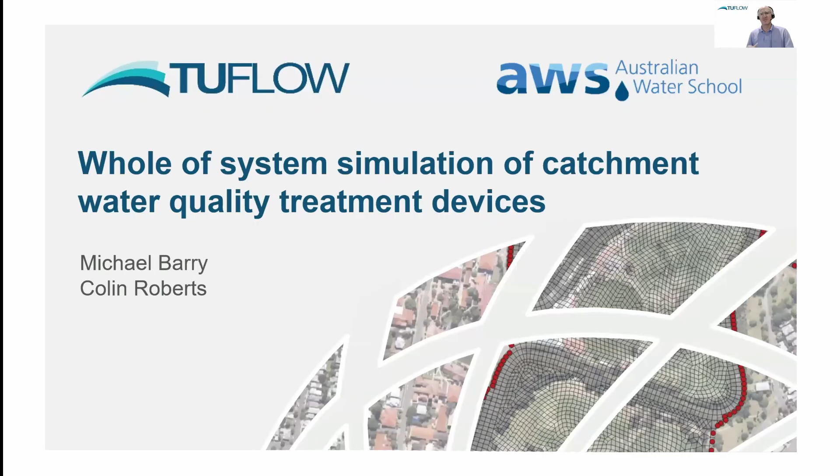So ultimately, we're doing modelling to improve our environment, and one of those improvements is treatment devices. So we're talking a bit about how we might do that these days with some modern tools and some outcomes, and we'll talk about a few different case studies around that.

So what we'll run through today is we'll talk a bit about the context, why we're here talking about this, what is whole of catchment water quality simulation, and what is simulation of pollutant treatment, or interventions as sometimes called. And that'll lead us naturally to a point of where we've come from as an industry in this space, and one or two current challenges that present themselves to our industry on an ongoing basis.

And so once we've come to those challenges and realize what they are, then we'll explore those a little bit with some case study using modern approaches to simulating catchment water quality processes, but more importantly, treatment devices or intervention devices. And we'll talk through a case study of how we've done that and look at some outcomes and some fancy animations. And then we'll wrap up.

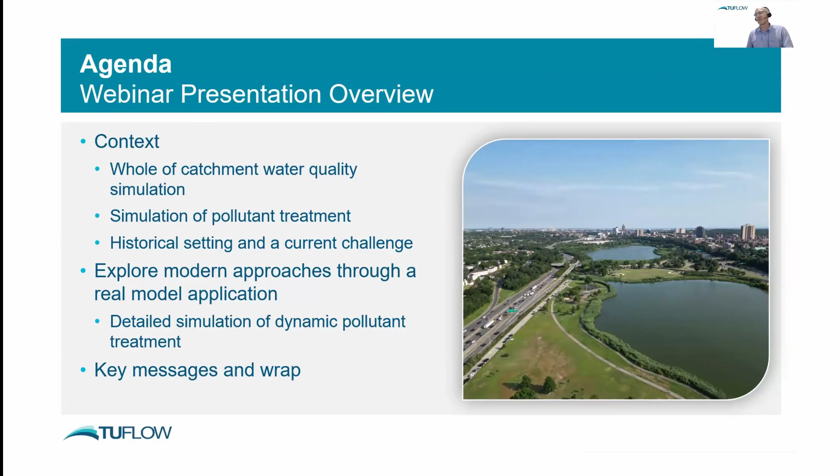So whole of catchment water quality simulation. What is it? Well, what it really is, we are trying to use numerical models or numerical platforms to simulate the passage of both water and the pollutants within that water as they travel through a catchment from source to receiving waterway. So from top of catchment to bottom of catchment, we are trying to dynamically simulate surface water, subsurface water, and the pollutants and constituents that go with those water flows. That's what we're trying to do.

Why? Well, in order to better manage our environment and environmental systems, we really need to understand the volume and mass fluxes, so the volume of water fluxes and the mass of pollutant fluxes. We need to understand what they are in our catchments to better manage our catchments. It seems pretty obvious, but that's what we need to do. And one of the reasons that we would need to understand those fluxes is so that we can intervene and control those fluxes or change those fluxes so that we can mitigate negative impacts of catchment change.

I'm sure we're all aware of catchment change around the world through urbanisation or deforestation or other related processes. Understanding volume flows and mass fluxes of pollutants as a result of those changes is really important, so that our end goal, not always, but mostly our end goal, is the protection of downstream receiving waterways and the ecology that goes with those waterways. So we really do need numerical tools that can help us robustly simulate whole of catchment water flow and pollutant flow and transport processes, so that we can start addressing these questions around how do we better manage these catchments and mitigate the impacts of largely human-derived interventions.

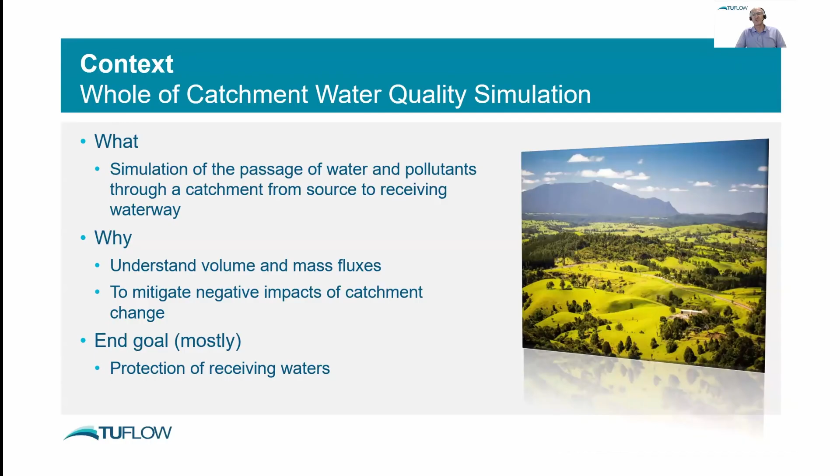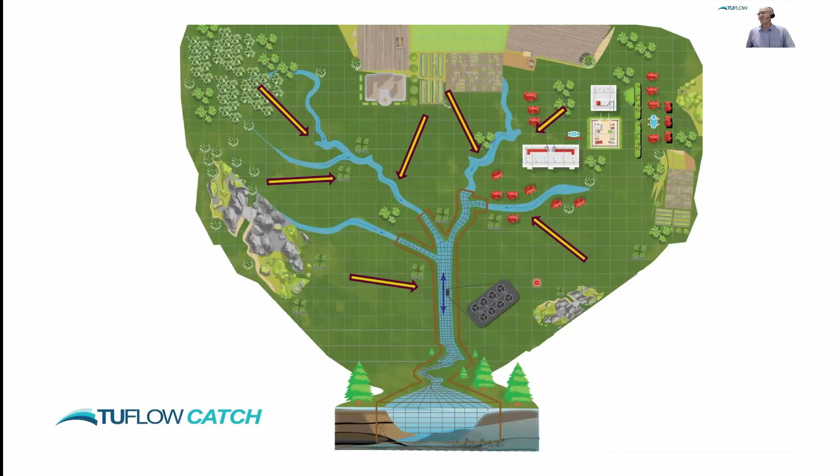But once we've done that, what we need to do is say, well, we understand those fluxes. What are we going to do about it? What can we do to mitigate or manage or reduce those fluxes so that environmental impacts are less from behavioural changes or land use changes that might have been occurring in the catchment? So what we'll try and do typically is then say, well, let's try and put some interventions or treatment measures in the catchment to reduce pollutant loads that are being delivered to our downstream waterways.

And those sorts of devices that we talk about can be wetlands, constructed wetlands, or swales, or filter strips, or bioretention systems. There's lots of different systems that can be put in place. And the idea of these systems is that they receive water from upstream and receive pollutants from upstream, and they remove some of those pollutants through a different range of processes, biological or otherwise. They'll mainly transmit most of the water that they receive, but they will remove pollutants.

So our job, if we're trying to minimize the impact of pollutant generation and transport, is to optimize on a catchment-wide basis where these devices are and how they treat pollutants, how they best remove pollutants from our waterways and therefore our downstream receiving water bodies. And so the end goal, not always, but mostly the end goal, in my experience, is that in understanding these fluxes and in designing and implementing some interventions or treatment measures, we can most effectively and efficiently protect and rehabilitate our receiving waters.

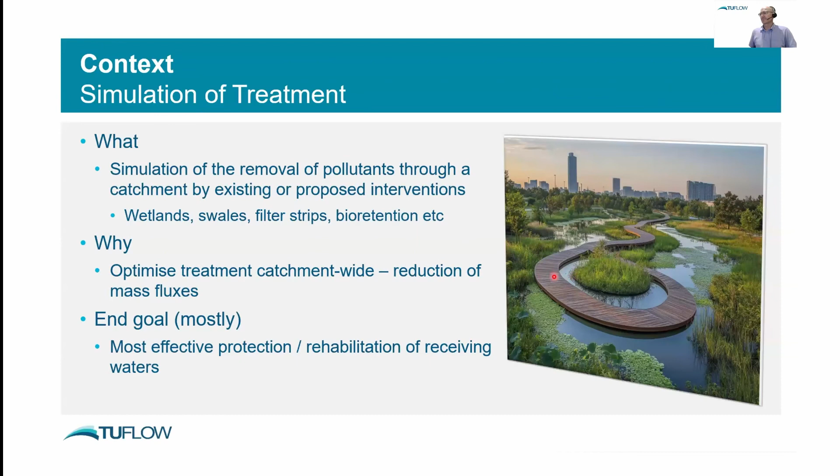Just going back to our previous figure where we had our catchment and our mass fluxes of both pollutants and water flowing off the land uses into the receiving waterway, our job with treatment devices is to say, well, let's try and put some treatment devices in this catchment in some locations and see what they do in terms of improvement of water quality. So just in this conceptual example, we'll say, let's put in some treatment devices where these green lines are that might intercept and reduce fluxes of pollutants or mass so that downstream of those devices, we go from yellow to green.

We've gone from higher fluxes of mass to lower fluxes of mass. We've removed some of those pollutants. They stay in those treatment devices and are removed, biological or otherwise. So that by the time we get to the bottom of our catchment or receiving waterway, we go from a red summation of pollutant fluxes to yellow, something a bit less.

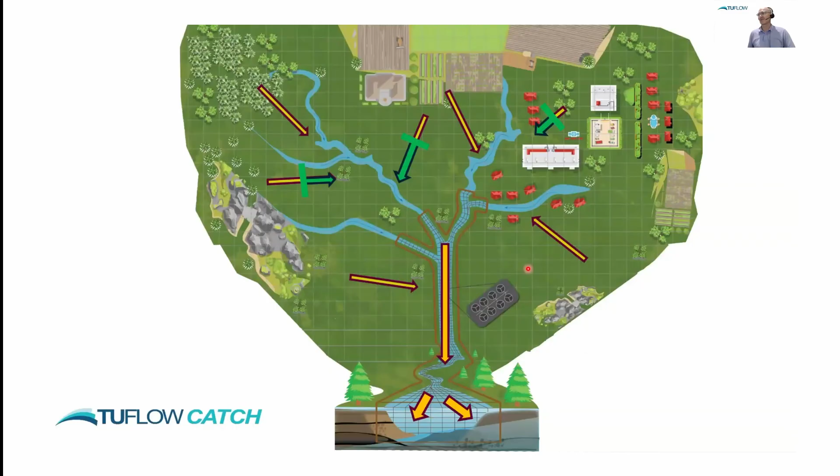So our job, I think, as professionals or practitioners in this industry is to work out where we put these treatment devices, how we configure them, how we maintain them so that we can get the best return on our investment to reduce these pollutant fluxes through our catchment to protect our downstream waterways. And that's what we're talking about today. So that's the basic process of volume fluxes and mass fluxes through our catchments and how we would like to go about understanding the treatment of those for environmental reasons.

How have we done that in the past? We have obviously used numerical tools in the past, generally speaking. And the primary approach for doing so, and it's not the sole approach, and I'm not meaning to say that's the only approach that's ever been used, but in my experience, since the mid-90s, the most common approach has been the use of lumped hydrology models to simulate water flow.

And when we say lumped, we're sort of talking about bucket models where we have conceptual buckets of rainfall falling on soils, and when the soil's wet, they discharge to the surface and water runs downstream, and one bucket's outflow becomes the next bucket's inflow, et cetera, down the catchment. And so we can end up with a bottom of catchment prediction for water flows using this sort of lumped or bucket approach.

And what we end up doing is we end up saying in our catchment, we might have 10 subcatchments, and each of those subcatchments will be a conceptual bucket, and everything within that subcatchment is averaged. We don't have any spatial resolution within those subcatchments. They are all one bucket. And they might be of the order of tens of square kilometres or hundreds of square kilometres in some cases. Inside those subcatchments, we can't resolve any processes other than what's happening with the buckets, where they're overflowing and filling up.

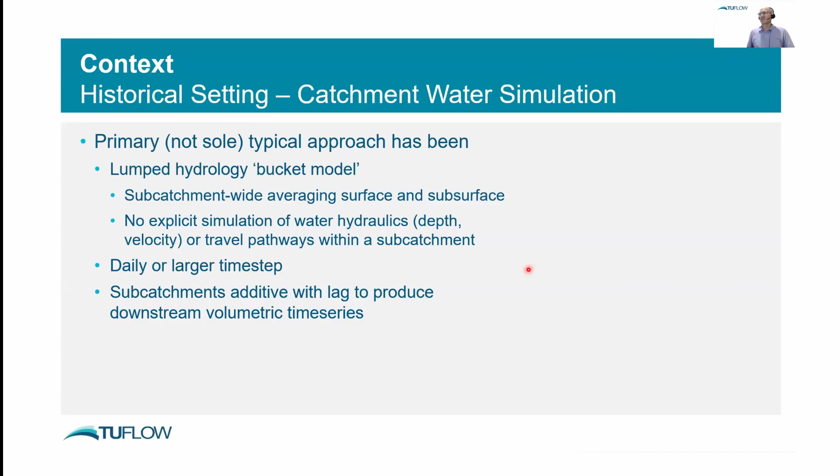And we can't simulate processes at a finer time step than our model operates on. And typically they are daily. And so when we do our hydrology, we do a subcatchment by subcatchment bucket analysis. We add up those volumes at the end and we say that's the flow coming out of our catchment. That's been the predominant approach from my point of view.

Something similar applies to pollutant export predictions in these sorts of models. And again, we use the lumped subcatchment or average subcatchment approach. And what we say is, well, given the land use mix in these subcatchments, we use some weighting algorithms to come up with an end of pipe event mean concentration and dry weather concentration for each pollutant we're interested in.

Once we have those concentrations, we multiply those concentrations by the lumped hydrology flow that we just got from the previous slide. And we say, well, this is the mass of pollutant coming off the subcatchment on a daily time step by getting a lumped flow multiplied by an event mean concentration. There's the mass. Again, on a daily or larger time step.

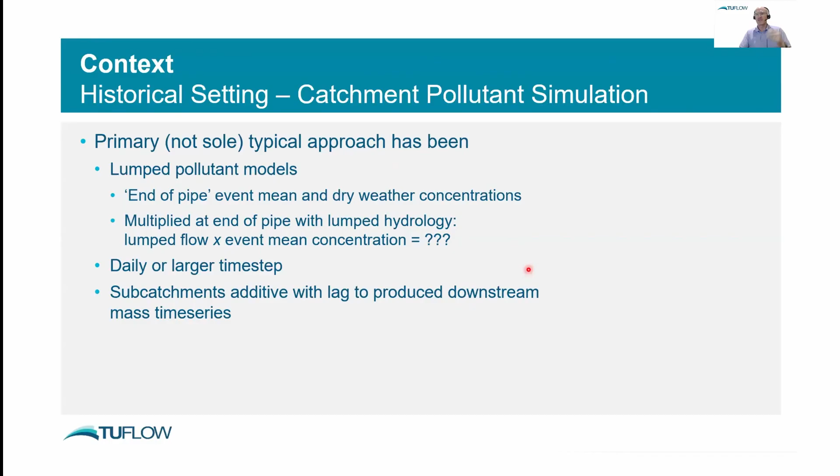And again, these are added up down the catchment. So at the bottom of the catchment, overall, we have the addition of 10 or 20 or 50 or 100 subcatchments worth of these pollutant predictions. Again, not the only approach, but certainly one that I've seen commonly used.

Again, the downsides of this we've talked a little bit about, but there are some upsides, of course, in this typical approach, and that is that it's fast. We can definitely simulate tens, hundreds of years worth of hydrology and pollutant export using these sorts of approaches because they're fast. And they're pretty good at looking at those multi-decadal timescales.

They're pretty good at looking at the relative impacts of hydrologic changes and pollutant export changes as a result of broad-scale gross land use changes, for example. So over 100 years, we're going to lose this much forest, we're going to build this many houses. What broadly happens to hydrology? What broadly happens to pollutant export? And let's do it quickly. These models are pretty good for that and have been used widely and successfully.

One of the downsides, and this is what we're talking about today, is that when we go for this lumped approach in our subcatchments, we lose on-ground connectivity between the detail of hydraulics, i.e. water flow pathways, and treatment interventions. So in a lumped subcatchment, we can't say this water flows through this device. All we can say is, look, we've got these devices in the subcatchment. We think they're going to remove this amount of pollutant, but we can't resolve it because we've lumped our subcatchments. So we miss that connectivity between what water flows where and into which devices.

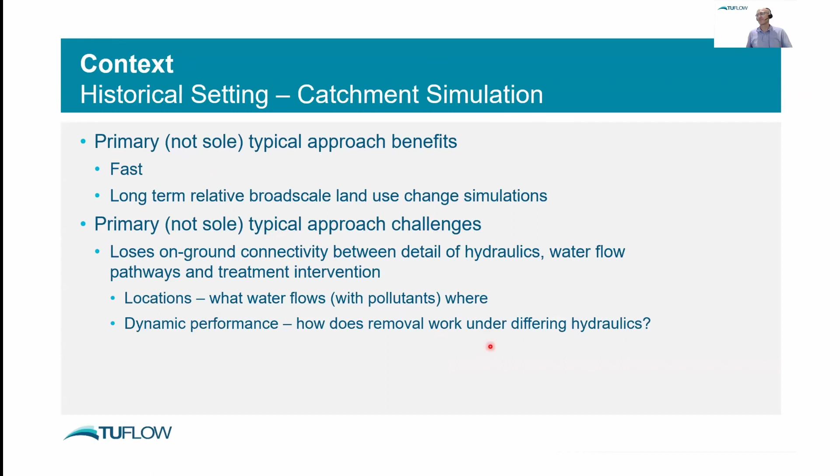So we need to attend to the spatial and temporal detail of hydraulics and treatment. That's what I think we do if we're looking at this key issue of connecting pollutant generation to pollutant treatment. And we're trying to really make sure that we're optimizing where we put our devices and how we configure our devices, simulating the detail of water hydraulics and pollutant generation hydraulics. How do we do that with modern tools that don't need those lumping or averaging assumptions? That's what we're looking at today.

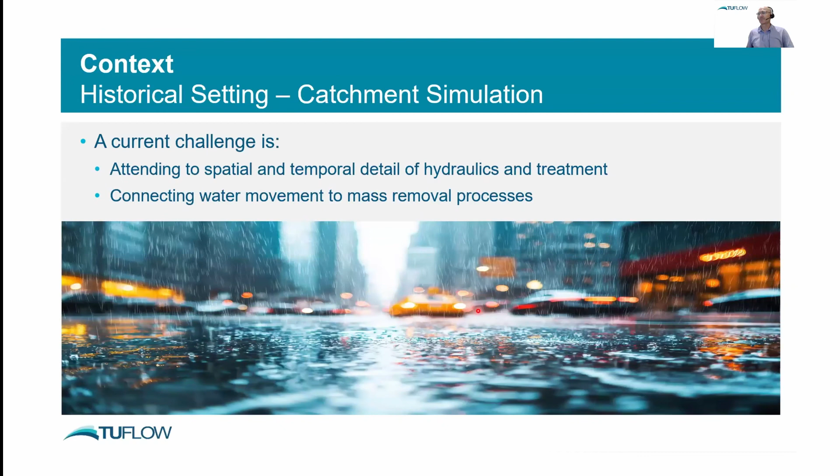How are we going to do that? We're going to look at a real model that's been set up to look at this specific issue, and it is of a catchment in Australia, in Brisbane, which is where I live. In fact, I live in the catchment that we're going to be looking at today, and it's known as Norman Creek Catchment. It drains directly to the Brisbane River, which is the main river in Brisbane, where Chris and I are based, at least.

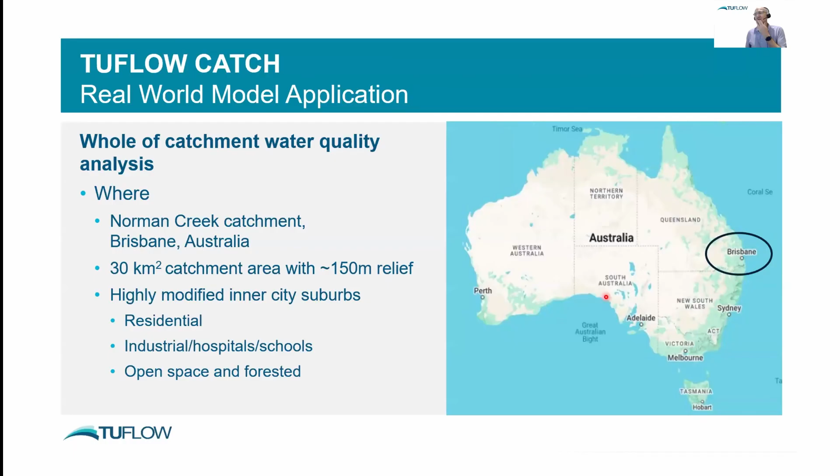The black ring here is where we are in general terms. It's roughly a 30 square kilometre catchment, so it's not huge, and relief top to bottom is about 150 metres. But it is highly modified in terms of its land uses because it's an inner city suburb. You can't really see from here in terms of land use, but you can see there's lots and lots of roads. So there's houses and there's industry and hospitals and schools. Although there is a little bit of open space and forested, but not too much.

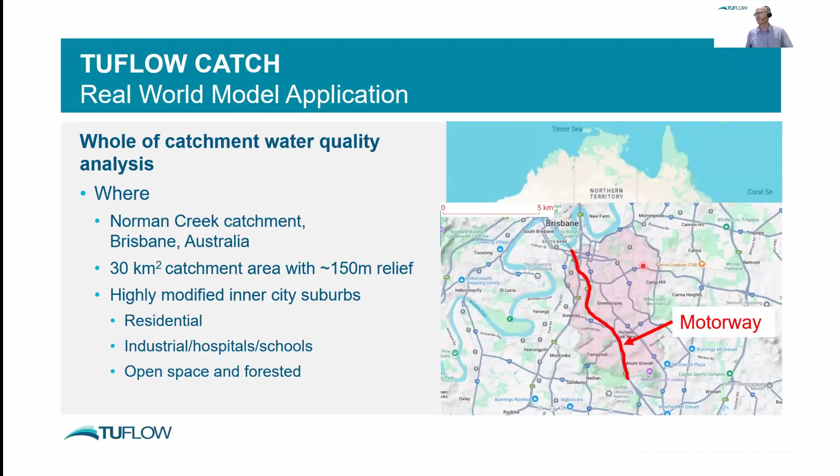What could we look at in a whole of catchment water quality analysis? Well, anything really. There's so much to look at, but we have to narrow it down, obviously, for a finite time of presentation. So we're going to look at sediment loads generated from roads in this Norman Creek catchment. And we're going to look at sediment loads generated from the motorway, which I just showed you, versus sediment loads generated from all other roads, everything but the motorway.

That includes the urban roads we might live on with our houses, and then arterial roads, and then things like highways, but not the motorway. That's motorway and everything else. We're looking at sediment generation from those separately so we can compare and contrast those. More importantly, we're going to look at how those predictions of pollutant generation can be treated through our devices and where we should put our devices and how they perform under different hydraulic conditions, etc.

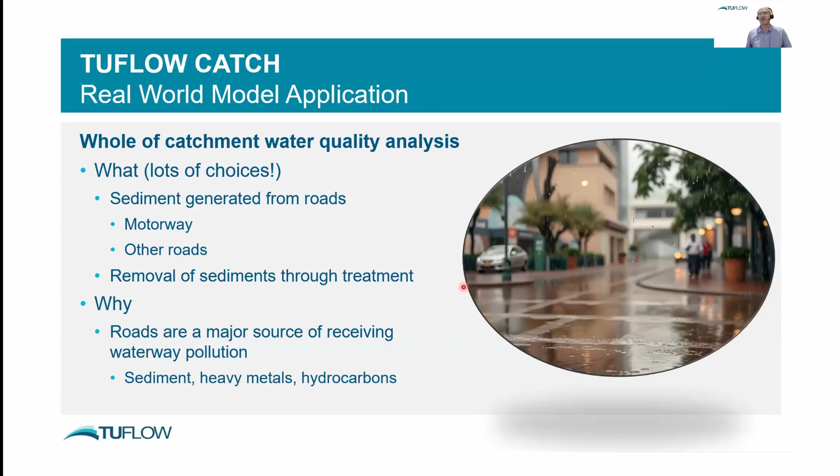Why are we bothering with roads? Well, roads really are a major source of receiving waterway pollution, not just sediments that we'll be looking at, but also a source of heavy metals that come from tire wear, brake pad wear, general engine wear, hydrocarbons, obviously dripping oil, petrol leaks, those sorts of things. So they really do contribute a lot of pollution to the environment. That's why we're looking at them today. But we will focus on sediments from the motorway, sediments from other roads, and see how they compare.

How are we going to do it? We're going to use a new product, TUFLOW CATCH, and TUFLOW CATCH is an integrated catchment and receiving model. It simulates explicitly the 2D hydraulics and pollutant export and transport throughout catchments from top of catchment to bottom of catchment with no lumping assumptions. It simulates surface hydraulics and subsurface hydraulics, as well as receiving hydrodynamics in 2D or 3D, as well as pollutant generation, transport and treatment, and it's all linked.

So we're not artificially linking one model with another. We can go from top of catchment right to the bottom in our tidal environment or our lake or whatever it is, all in one place without lumping or averaging assumptions. So this is getting to the whole issue we talked about before about linking water pathways with treatment devices. So we're actually simulating water pathways here on a highly resolved spatial and temporal basis.

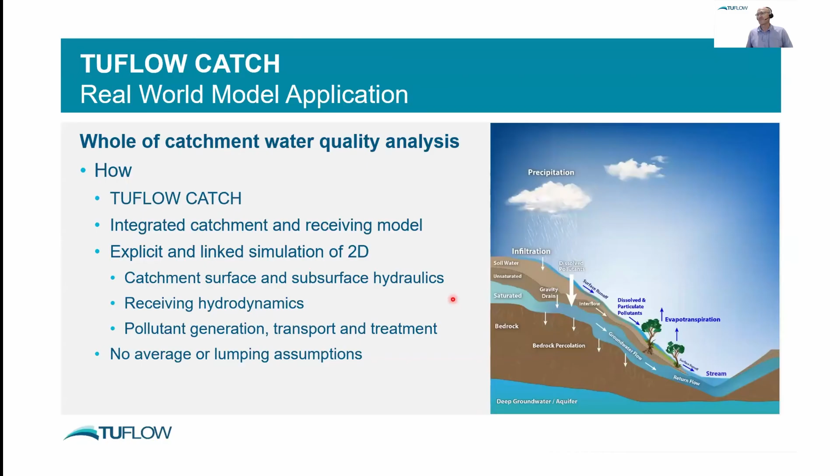Sometimes people think, oh, it's really complicated to set these models up. I need lots of data that I can't get hold of, and it's all very difficult. It's actually not. In this particular catchment, this is an inner city catchment, so it has lots of good data available to it.

So our model is a 5 meter grid size, and we have 2 soil layers, but the data we needed to build this model was all free, downloadable from the internet. I did it in not very long at all. I got the digital elevation model straight away. I got gridded rainfall that we can interpolate in TUFLOW and evapotranspiration.

All the land use and cadastre and imperviousness data was available from the local council, as was key pipe networks, some of which are in the model. It was all there. I was actually really impressed with how much data was available and everything I needed to build this model. I didn't have to pay for any of it or go on detailed data hunts. It was just there on the internet and away I went. So it was really easy to set up.

So we need to move away from thinking it's complicated to get all these data sets. It really isn't anymore. Depending on where you are, of course, in the world, understood. But in this situation, it was actually really easy. So please keep that in mind going forward.

That was in terms of hydrology, in terms of water movement, the TUFLOW model there. In terms of pollutant transport, we're focusing on sediment, and we're focusing on sediment from the motorway versus other roads. So what we used to force TUFLOW CATCH was measured sediment liberation rates. And these came from experiments that we conducted at BMT in 2003, 22 years ago.

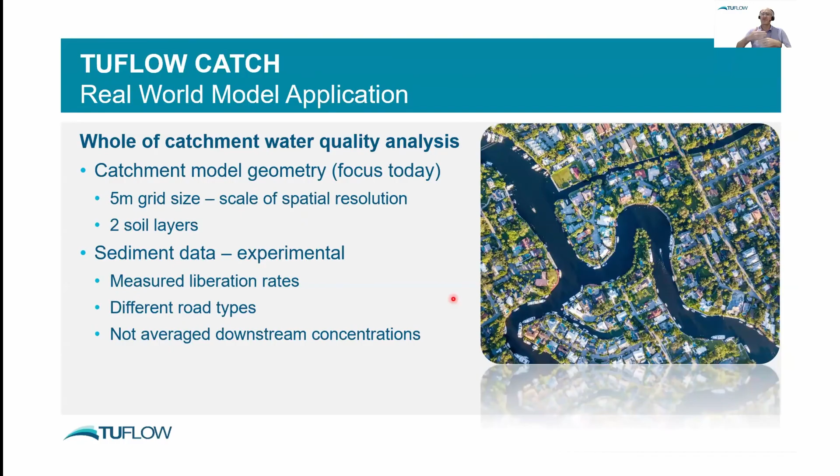So we have used those liberation rates to force and set up TUFLOW CATCH to say, if it rains with this intensity, what sediment is liberated from every 5 meter by 5 meter grid cell in my model, and then where does that go? We haven't said, oh, this is a forested land use, what's the event mean concentration downstream? We haven't done that. We've simulated from source using experimental data.

So we've been playing in this road runoff space for a while, and I'm going to show you one experiment that we conducted in 2003, actually right outside a house I used to live in. I don't live there now, but I used to live there in southern Brisbane. And this is a rainfall simulation that we did in 2003.

And from this experiment, we collected a whole lot of data that I've then used to populate this TUFLOW CATCH model, that data being generation or liberation rates of sediment from roads. So again, not the event mean concentration downstream, but the liberation of sediment from these roads. So let's have a look at the animation or the video here.

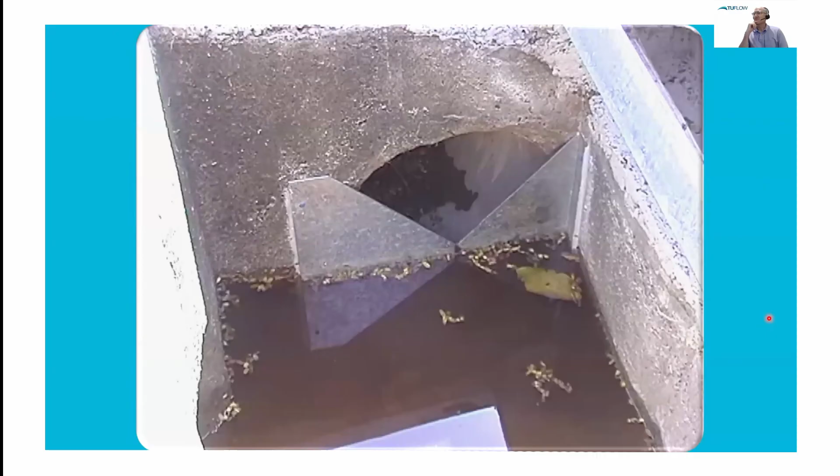Okay. There's no sound. This is Wemburn Street. This is setting up. That's me wandering around, not doing very much as usual. This is downstream of the gully pit where we collected water that came from all these rainfall sprinklers on the road. This is a V-notch weir in the gully pit that we measured flow with.

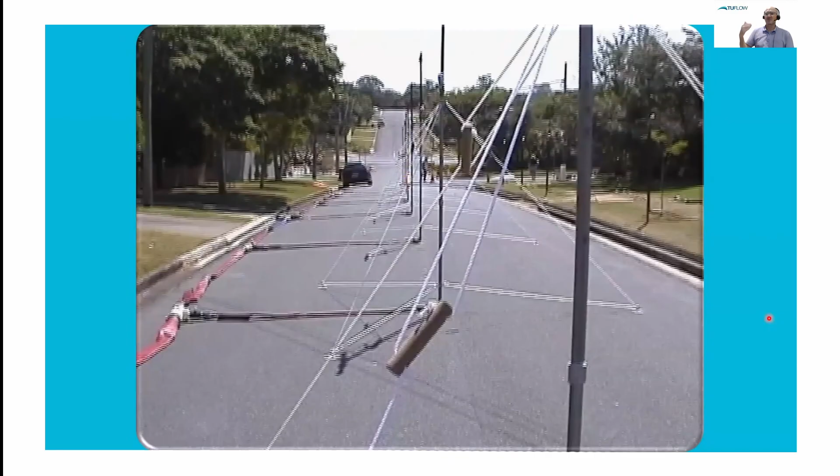So the idea is that we pumped water through these sprinkler systems onto the road to simulate rainfall, and then we collected flow rates and pollutant concentrations in that gully pit downstream as the simulation went on. Now we're going to start it up. So we're running around madly, turning on all the pumps, the valves and taps and things, and you should see water start to come out of the sprinklers, and it's falling directly on the road.

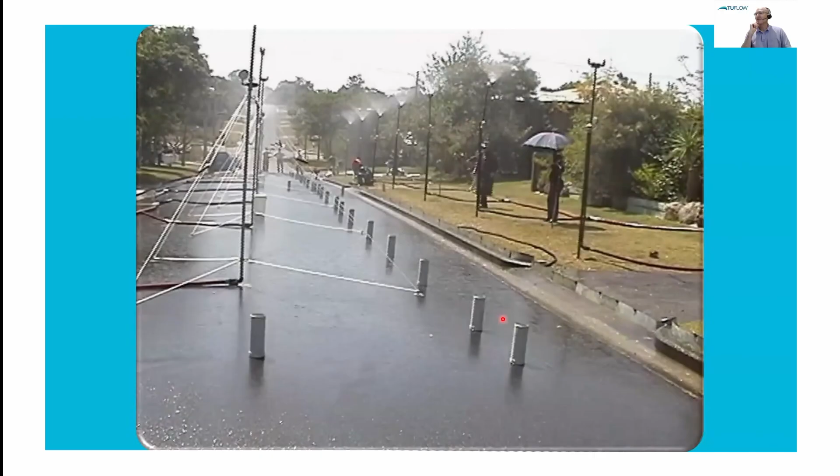These here are rainfall gauges to measure the rainfall rate. And this is at 45 mils an hour. You can see water's flying across the road and then down the gutter into the gully pit where we're sampling at the bottom. And this is our sampling going on down here. And lots of people watching and taking photos because it was pretty exciting at the time.

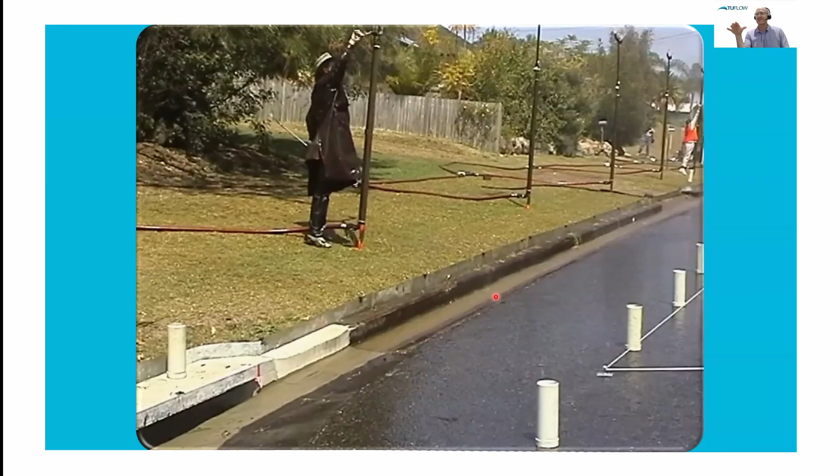And then we ramped up from 45 mils an hour to 110 mils an hour, which just meant turning on the second tap up here, which is what our colleagues are doing here with the extenders. That increased the flow rate, so we had more pollutants liberated. We got some more data around the extra liberation due to extra rainfall intensity, which is what we need to force TUFLOW CATCH.

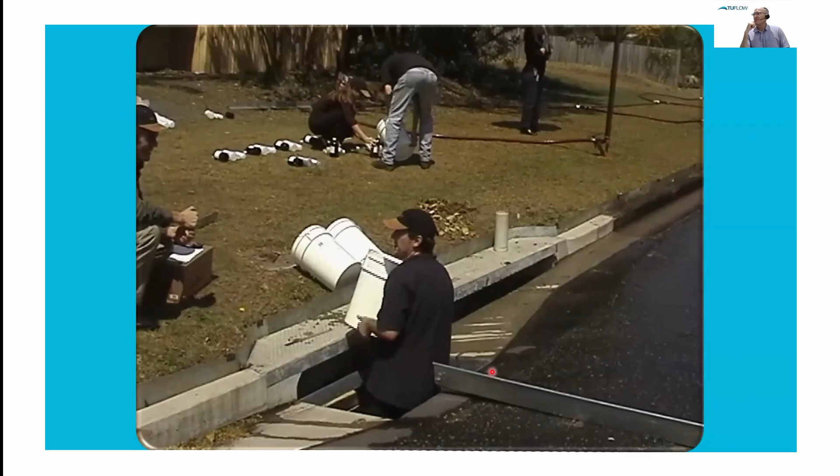So we're sampling now in terms of flow and concentrations, and then we took the water and we tipped them into sample bottles, and we did that progressively throughout the experiment so we get an idea of concentration and flow with time, which is really important. And we're measuring flow against the V-notch weir to get flow rate.

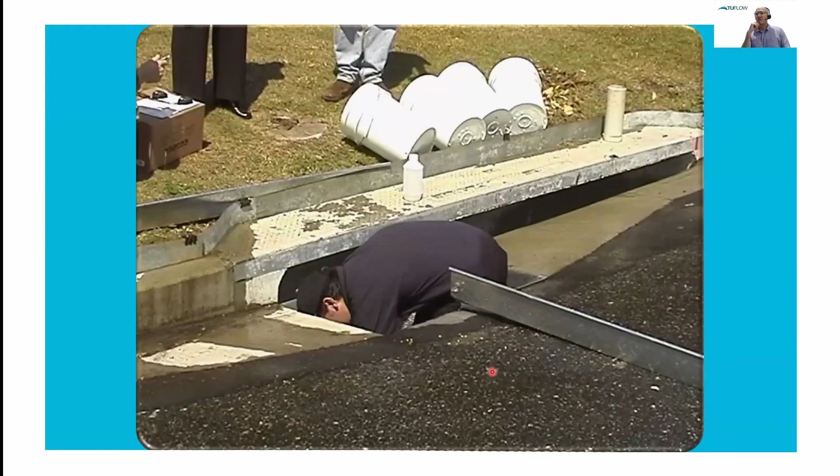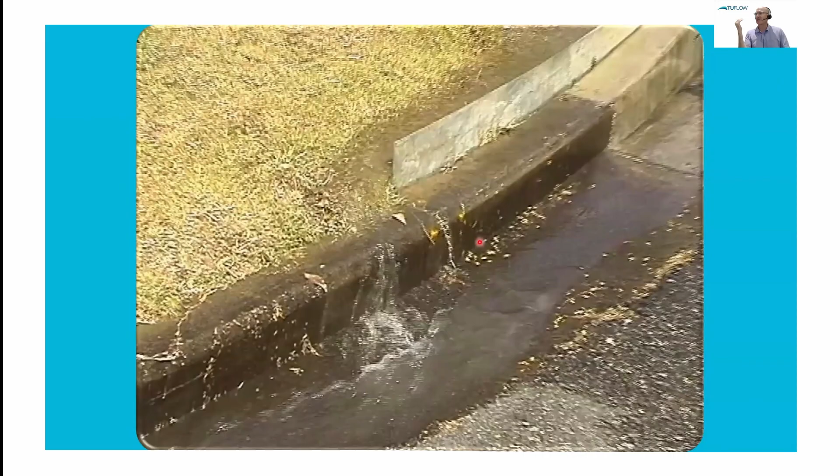We did have overland flow on the grass, but we kept that away from the road for these pits here, these plates here, so it didn't interfere with the concentrations we're measuring in the gully pit. It's only road runoff that we're measuring in the gully pit.

And then from left to right here, these sample bottles are early time on the left, moving through the simulation to further down in time on the right. And you can see that the color of the bottle goes from dark to light. That's because a lot of pollutants came off the road at the beginning and then less later on. So we got some really good information here about actual liberation rates of pollutants, particularly sediment from the roads.

We're able to use that to populate TUFLOW CATCH, which generates actual pollutant runoff and does not make average assumptions about event mean concentrations, but actually does what happens in the environment. So we use that information to populate TUFLOW CATCH.

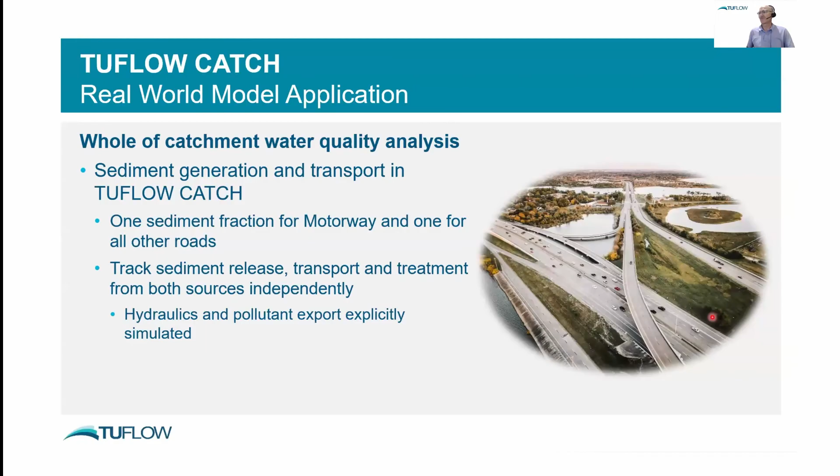And what we did in TUFLOW CATCH, because we've done experiments on the motorway and on suburban roads, we said, let's use one fraction of sediment for the motorway and one fraction of sediment for other roads so we can track them independently and compare them to see what's going on. We track sediment release, transport, and treatment from those sources, so motorway versus other roads. And importantly, we simulated hydraulics and pollutant export explicitly on a 5 meter by 5 meter cell basis.

Okay, we simulated one event for demonstration purposes here. We'd simulate a year or 2 years typically, but we've just done one event here so I can talk through some key features. We typically do multiple years.

We didn't account for hydraulic throttling in these devices, which we assume to be wetlands. That's easily done with TUFLOW because TUFLOW is a hydraulic model. We can simulate pipes and V-notch weirs and orifice plates and all those things that are typified by wetlands. We can simulate those. I just didn't do them here for simplicity, but they can be done.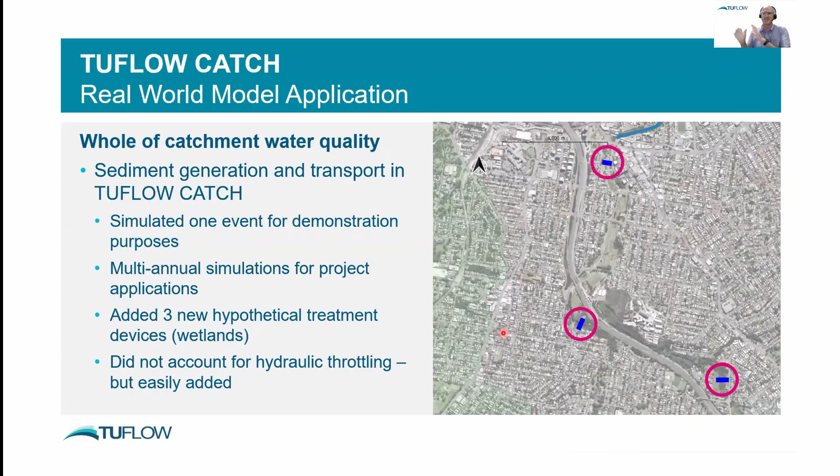So we simulated runoff directly on a 5 meter by 5 meter grid, the surface and subsurface. But in our treatment devices, we could say let's just have a constant treatment rate. Say, look, let's just remove 20% of pollutants that come into each device. That's not very meaningful because we know that different treatment devices behave differently in terms of their pollutant removal, depending on the hydraulic conditions of water coming into the device and the concentrations of pollutants coming into the device.

So we know, for example, that water coming in relatively slowly at very high concentrations usually has a better treatment removal ratio than heaps and heaps of water coming in very quickly at low concentrations. So we know that happens. So we try and account for that in TUFLOW CATCH by setting up treatment lookup tables for each device.

And the lookup tables are on the right here, and they are really just flow rate versus concentration. And each of these numbers is a removal percentage. So, for example, for a flow rate of 4 cubic meters a second coming into one of these devices, we're going to say that 20% of pollutants are removed if they come in at 1 milligram per litre, but 60% are removed if they come in at 80 milligrams per litre.

These are just made up numbers. I'm not saying these are real. They're just made up as an example. But what we're trying to do is say that treatment efficiency changes for a given flow rate with incoming concentration. And similarly, for a given inflowing concentration, say of 50 milligrams per litre, we know we're going to get better treatment at lower incoming flow rates compared to higher incoming flow rates. So we've accounted for that in our simulation of pollutant removal in TUFLOW CATCH.

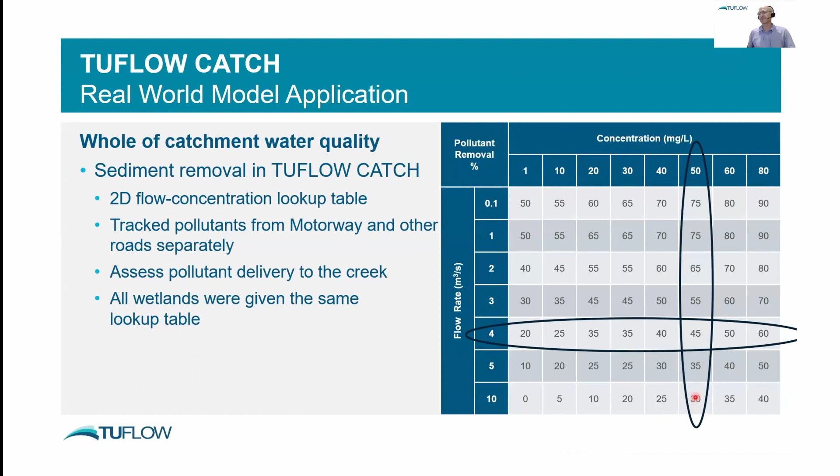So we're going to look at some results now, some animations, remembering our catchment with the motorway running through it. What's about to come up on the next screen is 2 panels, a left panel and a right panel. The left panel will be an animation of motorway sediment runoff only, and the right panel will be an animation of sediment runoff from all other roads only. Different sediments, one from the motorways, one from all other roads, and you'll see the sediments run through the roads and through the treatment devices and whatever else.

We don't have any treatment devices in place at the moment. It's just showing the difference between the motorway and all other roads in terms of their pollutant generation and transport. You'll see there's very different distributions of pollutants between those that have come off the motorway and those that have come off all other roads. And you'll also see there's some tidal action down in the Norman Creek itself where TUFLOW CATCH has that tidal simulation going in 2 dimensions.

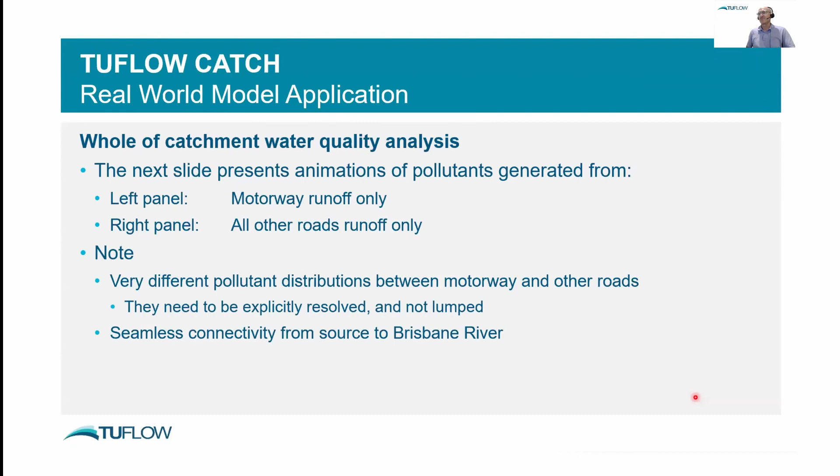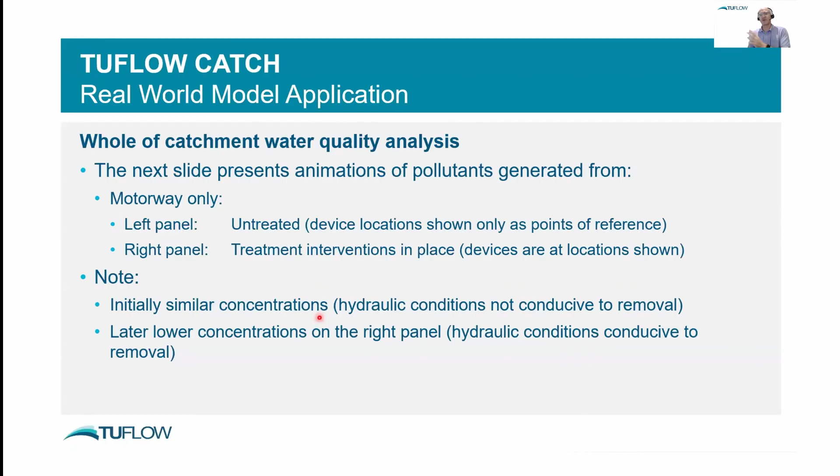Initially, they'll look similar, but they will evolve in time to be quite different. So please keep an eye on that. Here's the treatment devices, of course. On the left-hand side, these are not in place, but I've put them here just for visual reference so you can see where they are. They are in place on the right-hand side, and they are treating on the right-hand side.

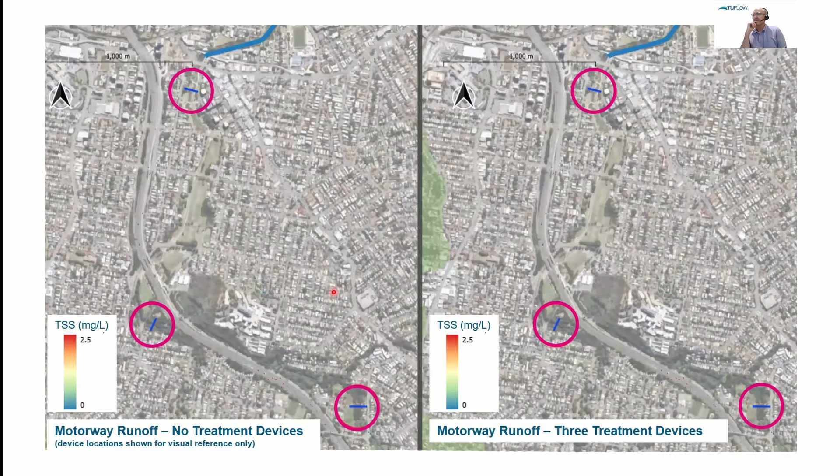Again, we're plotting TSS or total suspended solid concentrations on this color scale here. All right, so I'll run this animation, and you'll see when it rains, comparing left with right. Left is no treatment, right is treatment. Initially, they're not too different, but then as the event unfolds, there is quite a difference between left and right. Much redder on the left than on the right.

Why? Because we have treatment devices in place, and we are actually physically connecting hydraulics with treatment devices. So we're not making lumping assumptions saying, let's hope this water goes into here. We are actually simulating the connection between the two.

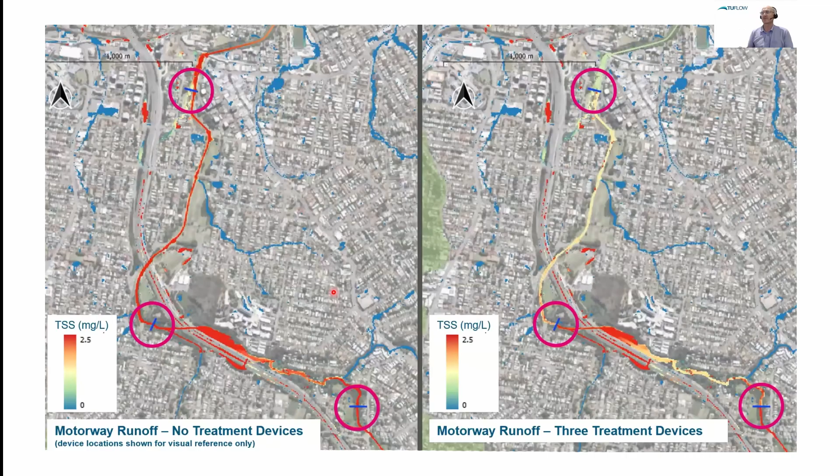So this is a screenshot here from that last time step. And what you can see is at these 3 locations, for example, on the right-hand side where treatment was in place, downstream of our 3 devices, if we compare that to the same locations on the left with no treatment, they are clearly very different. And that's because pollutants have been removed by our devices.

So we can go one step better than that and we can stop looking at animations. They're nice to look at, but what we can look at is some actual results, some graphs of pollutant loading rates, for example. So we're going to go back and look at time series graphs of loading rates of sediment to Norman Creek.

So that's downstream. Now, we can look at these loading rates because our time step is on a 1 to 10 second time step. So we have a detailed description of loading rates coming into Norman Creek that is not lumped on a daily basis. It's actual time series of these loading rates.

And we're going to look at firstly motorway loading rates and then secondly the other road loading rates. On both graphs, we're going to have a blue line and an orange line. The blue line is for untreated and the orange line is for treated. So we'll be able to see the difference in loading rates between the two for each of the motorway and other roads.

And this is the quantitative side of things that you can use in your studies to say, actually, if we put in these intervention devices, this is the actual reduction in load we get. And this is the time series evolution of that load reduction.

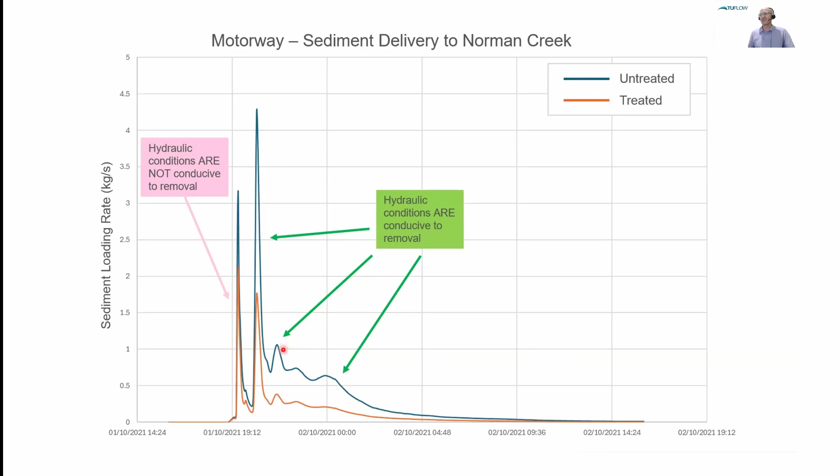And this is really important because we are resolving on a very, very fine time step what's actually going on in these devices. Same thing for other roads. We have lower loading rates for the treated simulation compared to untreated, and really not much difference at the beginning of the simulation. Why? Because hydraulic conditions are not conducive to that, but they are as the simulation goes on. So the device starts doing what it needs to do.

We need to resolve these sorts of things to make sure we're getting our devices simulated properly. And that's what we're saying today. A couple more slides, not too many.

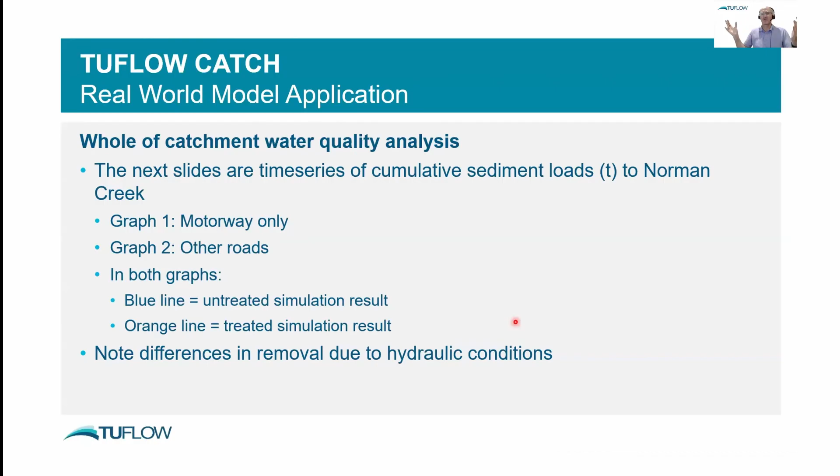Instead of presenting instantaneous loading rates in kilograms per second, what we're going to present now is cumulative sediment loads in tons to Norman Creek from motorways and other roads again. Same lines, blue and orange, treated and untreated, but we're not presenting instantaneous loading rates. We're presenting cumulative loads that arrive in the receiving waters over time.

This is for the motorway. Again, untreated is blue and treated is orange. Time and cumulative sediment loadings on the vertical axis. You can see again that by the end of the simulation, we've removed about 0.2 tons of sediment from the motorway from our treatment devices, which is the difference between the blue and the orange line here.

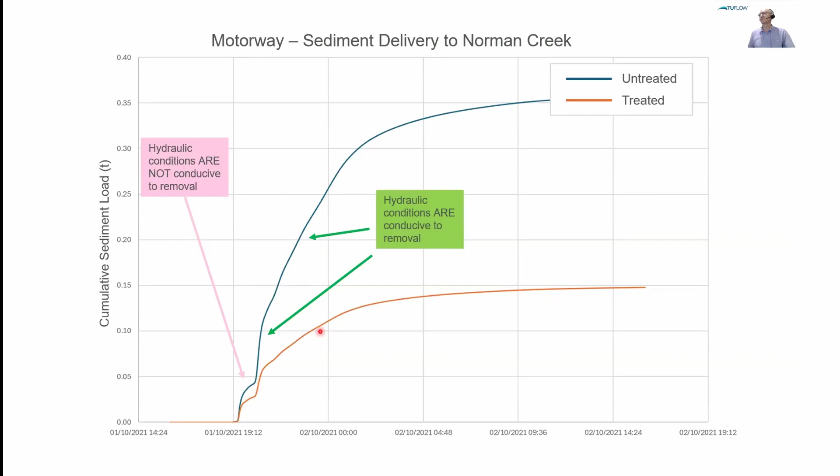But again, we haven't done really very much at the beginning of the simulation because the hydraulic conditions didn't let us do it. But by the time we got through to the second end of the first day, the conditions were pretty good and the devices did their stuff. And that's why this big gap opens up between these cumulative loads between treated and untreated, because the conditions were right. Same for other roads, smaller mass loads, as we talked about.

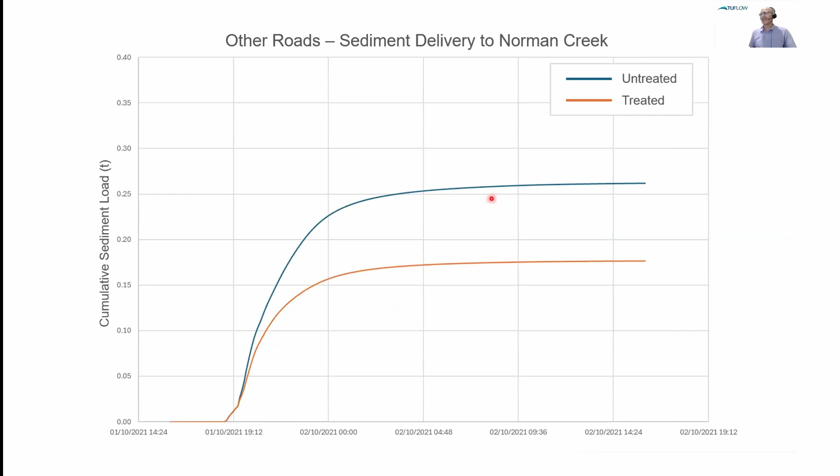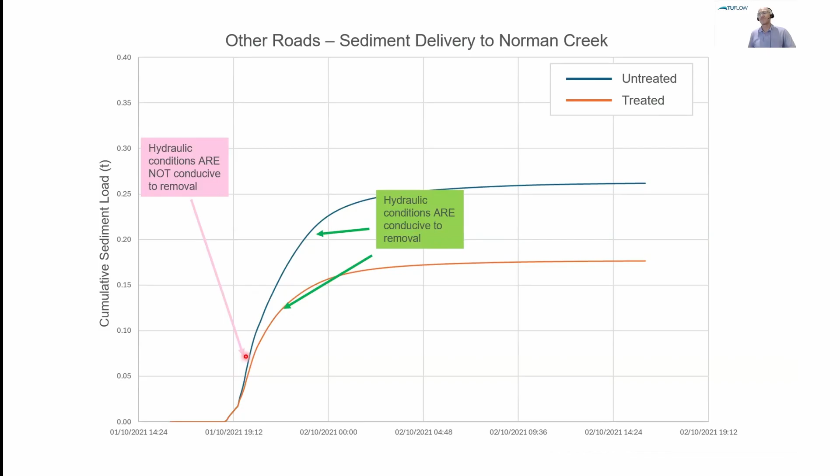But again, this final difference here of about 0.1 tons, it's really all due to the difference here after the initial flush where there wasn't much action, where the hydraulic conditions were not right. So we can look at now efficiencies of our devices.

And what we've got here is just wetland 1, wetland 2, wetland 3 in these columns. And we have how they've treated motorway sediment and other road sediment. We've got entering sediment, entering and leaving, and therefore we can look at treatment efficiency. But if we look at the sediments entering these devices, the motorway has got almost twice as much runoff in terms of load as the other roads.

Which you knew because the motorway has a whole lot more loading from lots more vehicles, which is why we're getting this. But if we look at the treatment efficiency, which is a ratio of leaving to entering mass fluxes of sediment, wetland 1 and wetland 2 are around about 65% removal efficiency. Wetland 3 is at 86%. Why is that when they had the same lookup tables for the removal of pollutants?

Well, the reason is because the hydraulic conditions in wetland 3 were very different to those in wetland 1 and wetland 2. The hydraulic conditions were favourable for removal of pollutants. So as managers of our environment or modelers of environment, we should say, hey, there's something going on in wetland 3 in that location. We can do really well there to remove lots of sediment load. How should we better design that wetland to capitalise on that outcome? Or how can we better design these to do better than 63 or 65%?

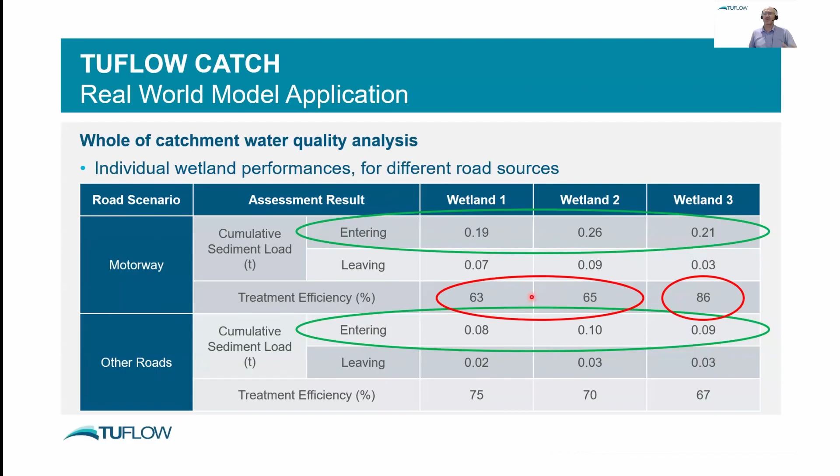But at least we know where to put these things and how they're performing over the course of the duration of events. This is really important. We cannot get at this with lumping in time and lumping in space. We have to simulate these processes explicitly. So these results provide clear planning focus for us and modeling focus for us.

We know what to do next now because we've got a really good idea of what devices are doing and how they're doing it. But we can only discern this because we've explicitly simulated in space and time the hydraulics and pollutant export of our catchment. We haven't used lumping assumptions, and lumping can mask this vital information. So I'm suggesting that our next steps in our industry is to do it a bit better and look at these sorts of processes in more detail instead of making lumping assumptions.

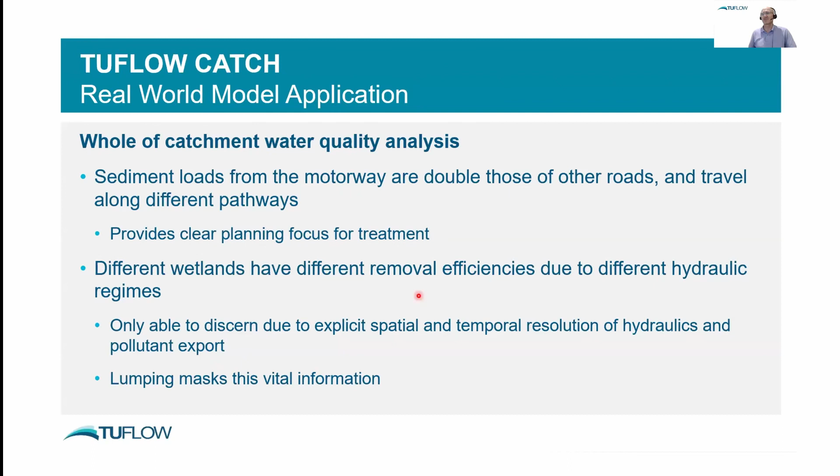Okay, last slide. Whole of catchment water quality analysis. Explicit spatial and temporal resolution is really important. If we want to meaningfully design these devices, we have to know what water goes where and what it takes with it. We can't lump anymore, and we don't need to because computers are fast. GPU acceleration means we can do things fast, so we should be doing things much better than we have in the past.

But we need to use appropriate modeling tools to answer the questions being asked. So again, long-term, broad-scale, lumped models for hundreds of years simulation. There's a lot to be learned from those models, and they can provide really valuable information to us as an industry. But my thoughts are that if we really want to do better with designing intervention and treatment measures on a high temporal and spatial scale, we've got to be using tools that don't make lumped assumptions. And that's what today's really been about.

And with compute power increases, they're getting faster and faster every day, GPUs, thanks to our gaming friends. We can continue down this path, I think, as much as we need to.

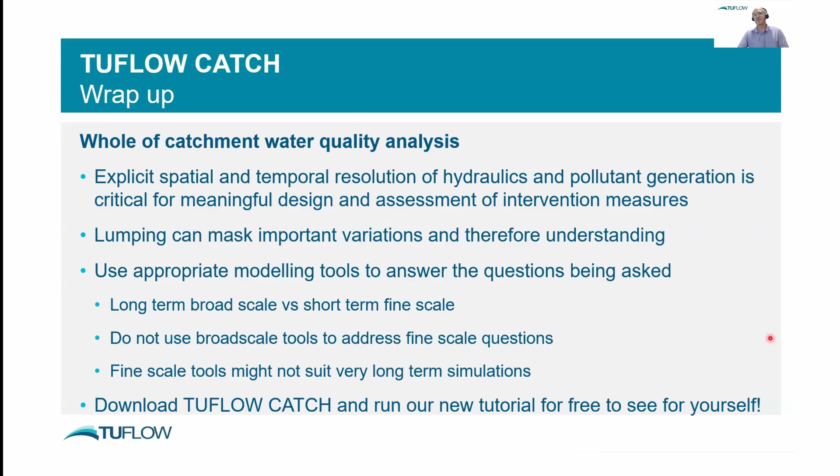Oh, wonderful. Thank you very much, Michael. That was a really great presentation. Pleasure. Sorry about the grainy footage in the 2003 video. Looking at a younger Michael Barry. That's right. I had hair, I think. I'm not sure. Just a little bit.

Look, the question and answer line has been running hot, and Cole and I have been very busy answering what we could. I've been taking note of some questions that I thought might prompt some discussion or could be fleshed out a little bit further. So I'll just run through what I have here.

Okay. One was, is there the capability to simulate different kinds of pollutants, total nitrogen, total phosphorus, gross pollutants, along with custom curves for pollutant load by land use? For example, a natural environment will have a very different TN concentration in runoff from an urban setting versus a farm.

Yeah, 100%. So I chose sediment, but to be honest, TUFLOW CATCH doesn't even care what is simulated. You can call the pollutants whatever you like. The key is that you give those pollutants their unique and characteristic pollutant generation properties on a cell by cell or land use by land use basis. So we have models where we simulate ammonium and nitrate and phosphorus and organic carbon. We just give them different properties for their pollutant generation, and TUFLOW CATCH takes care of the rest. So absolutely, you can do those different properties on a land use by land use basis.